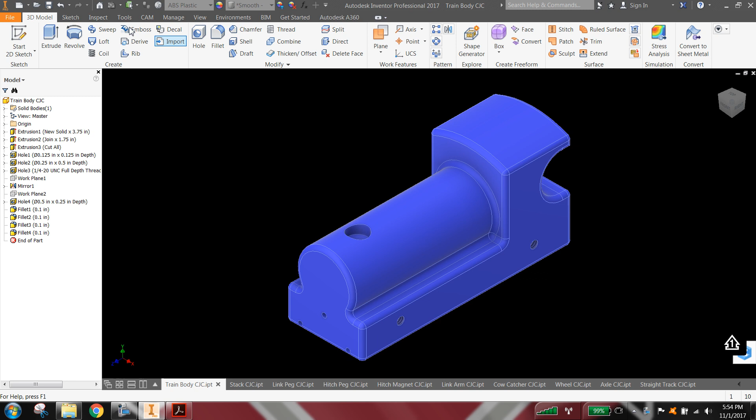Okay, now that all the parts are built, we want to do the assembly. So we'll go ahead and start a new assembly file. Make sure you don't start a weldment assembly. I always like to stay in isometric view when I'm working on things. So I'm going to come up here and place the base component of the train, which of course is the train body. So I'll bring that in.

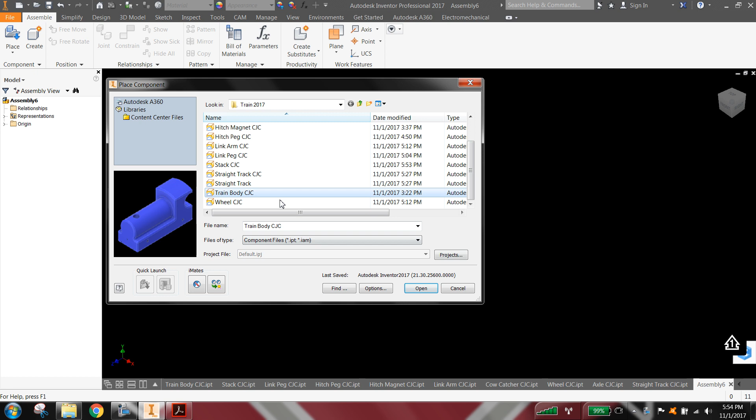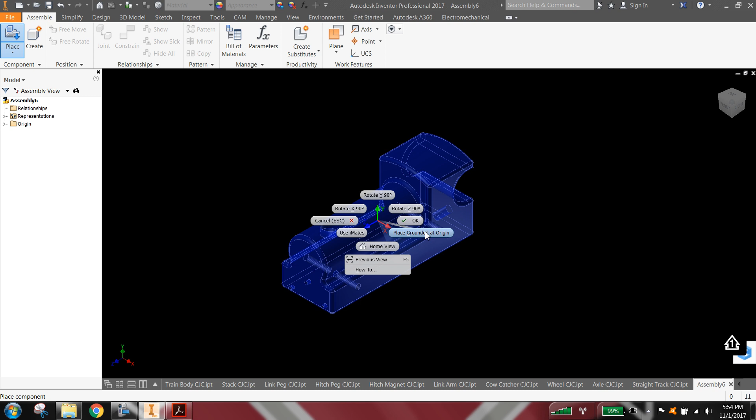Okay, and when I do that, if you happen to build it laying on its side or standing upright or something, you can come in and select rotate around X, Y, or Z, and you might have to do that multiple times to get it in the right orientation. What you do want to do always is ground that first part at the origin. Okay, and then it pops up with another train body. So that tool is still active. If I wanted to bring in multiple of the same part, I could do that. Well, I don't want to.

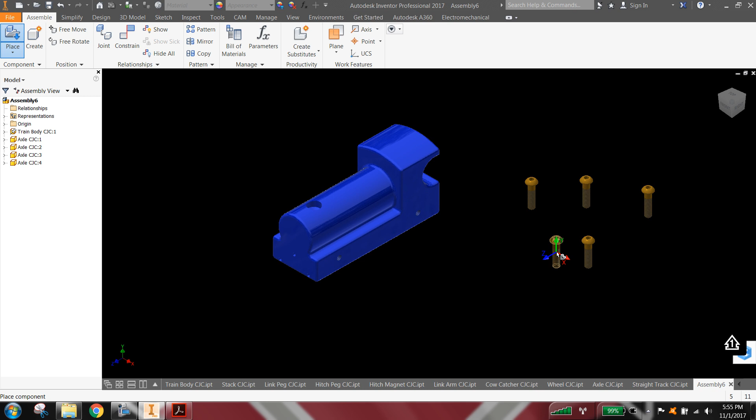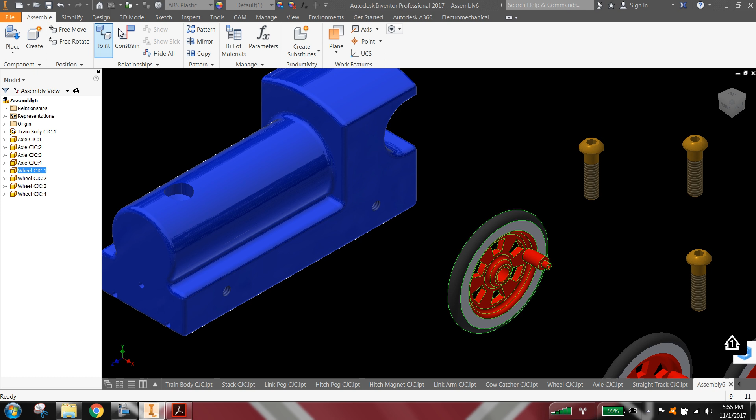Next thing we would do, let's go ahead and bring in the axles and the wheel. Okay, so there's 4 axles, and let's bring in a wheel. Actually 4 wheels. Okay, so most of the train, because all the parts are round, are put together with inserts. That's what we would do. We would insert the axle into the wheel, if we're doing this physically, and then the axle would go into the train body. So I'm going to go up to Constrain, and here's the insert constraint.

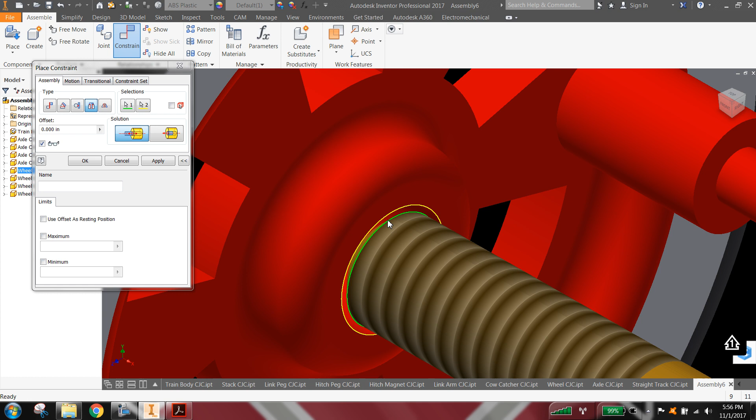And now here's where you need to get good with your mouse and picking things. If you pick the end of the axle, because it looks like that's what you might want to do, and pick the end of the wheel, well, you inserted it, but all that really does, as you can see, is line up circles. So I don't want that. What I want to do is line up the circles that need to be up against each other. So I'm going to select Insert again.

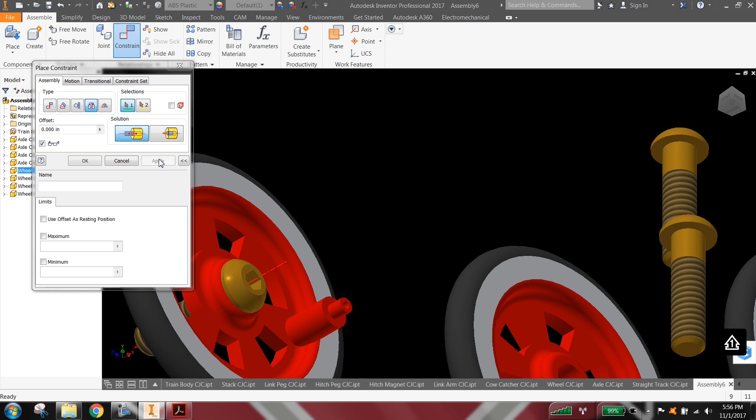And so this, what circle hits the wheel? That one right there. That hits the wheel on the outside edge. Okay, now you heard that pop. That's a good thing because that means it's going to be successful. So I'm going to go ahead and select Apply. Okay, and then we would have kind of the same thing going on with putting that wheel onto the train body. I can't see the inside of where that hole ends very easily.

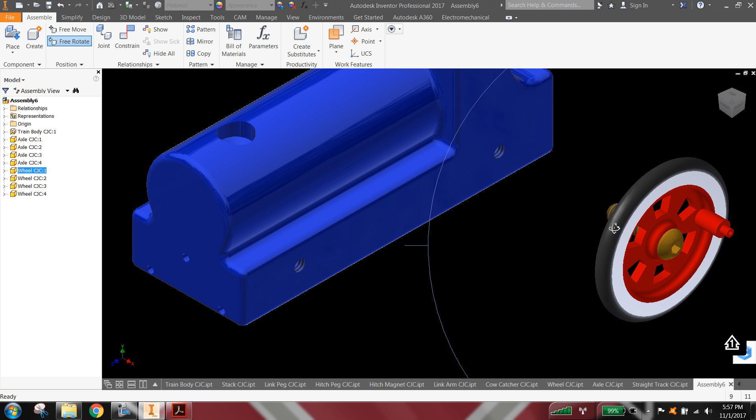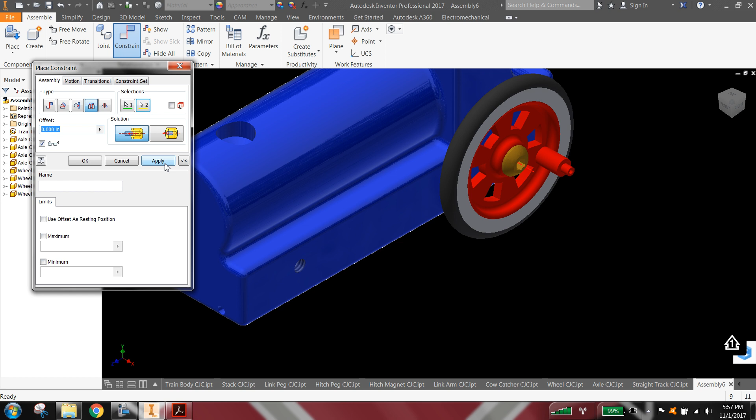So what I want to do is I have this free rotate tool up here. I can rotate around the wheel, and I know, yes, the axle goes into the hole, but in terms of the assembly, all I really need to do is align with an insert constraint the back of the wheel with the outside of that hole and click Apply. Okay, so that's very simple.

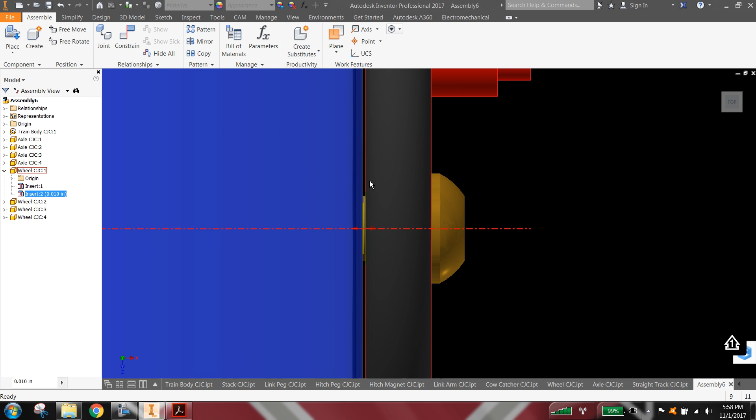Now, we have a little problem with that. If we're trying to be realistic, you can see we just screwed the tire tight to the side of the train body. So to be a little bit more realistic, let's find where that wheel is. If I point at it, it highlights in the browser. That was my second insert. I could do this on the fly if I knew what I was doing, but what I want to do is make a 10 thousandths gap on the spacing between the inserts. So we're going to offset that 10 thousandths. When I do that and you zoom in, you can see now we have a gap big enough to let the tire spin. Okay, so the rest of the train is pretty much put together with inserts.

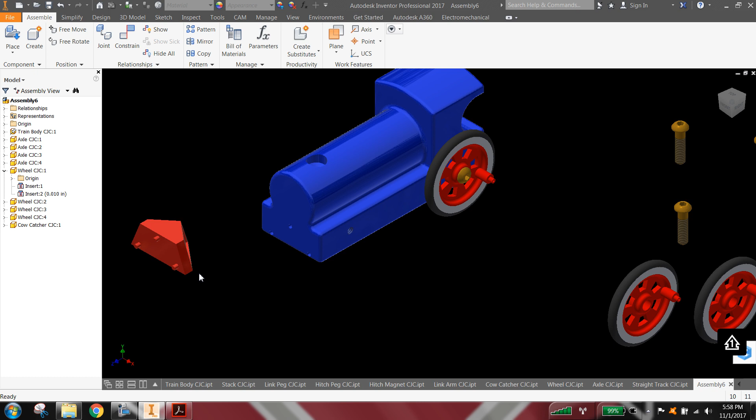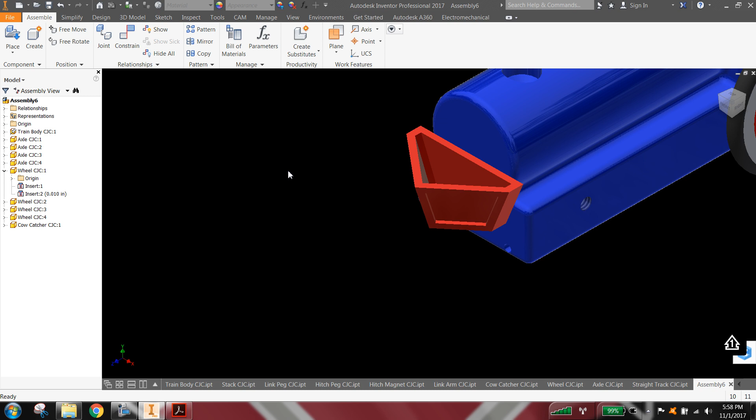I'm not going to do all the wheels. Let's demonstrate one more with the cowcatcher, because it has 3 pegs. So again, we're going to constrain, insert, and again, it's hard to get the inside of the hole. So I'm going to pick the outside hole with the circle on the back side of that peg. And I click Apply. Okay, so now what happens, oops, let's hit Escape.

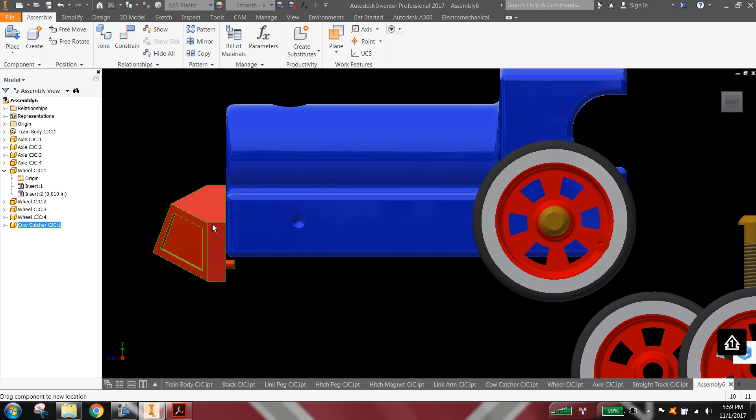I did a free move now, and it pops back into place when you start moving it. So we can see that it is up flush against the train body, but it's still rotating. Even though that's physically possible at times, it's still spinning around. A part before it's constrained has 6 degrees of freedom. It can move in the X, Y, and Z axis as a translation. That's 3 degrees of freedom. And it can also rotate around X, Y, and Z. And that's what happens right now. With that 1 degree of freedom remaining, it's rotating around the Z axis.

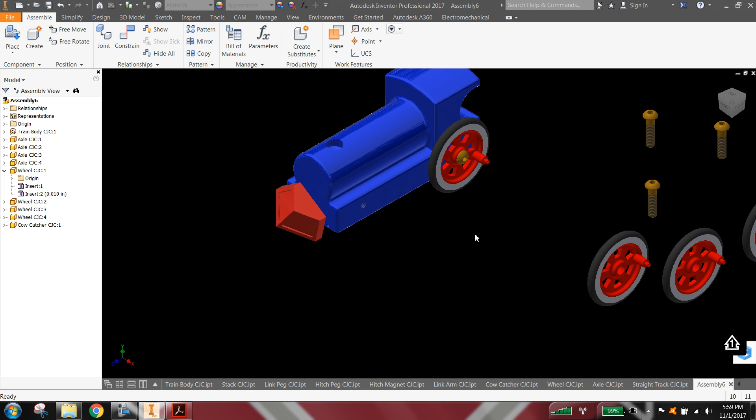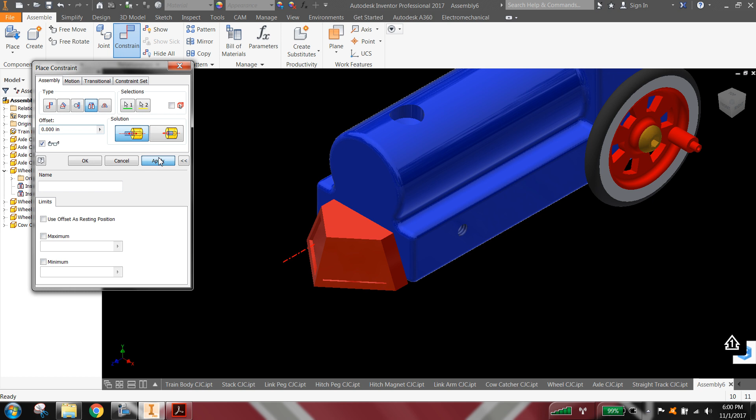Now, it's hard to see the parts that we need to put together. So I'm going to do a free move of the cowcatcher out, and then do a free rotate and rotate that around, because I need to put at least one more constraint on there so that part quits moving. So I'm going to pick, again, one of those back circles of the peg, and the other one, and click Apply, and that should be good. So now when I go to grab it, I get the Ghostbusters can't-move-it sign. That part is fully constrained.

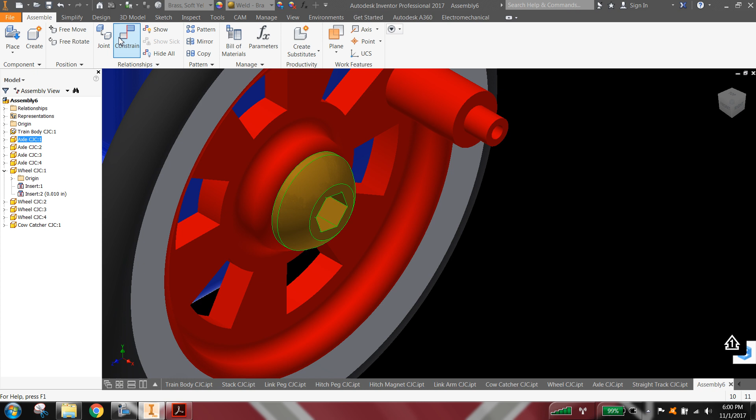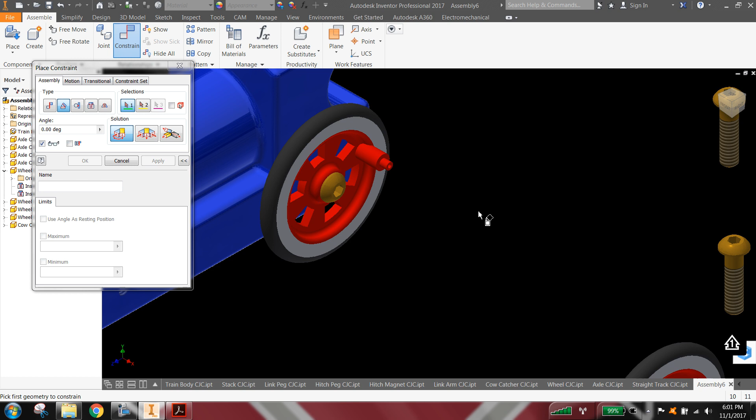Now, on my tire, the wheel still rotates, and in fact, the axle still rotates. Is that axle really going to rotate in real life? No, it wouldn't. So it's not going to really affect it any. But if that bothers you, we could put an angle constraint, and I could pick one of the sides of that hexagon and constrain it with a 0 degree angle to the bottom of the train and click Apply. And now that we have that constraint on there, the axle doesn't move, just the wheel moves.

Okay, so I'm going to leave it to you to put the rest of the train together with insert constraints, and in the next video we'll talk about angle constraints and getting it on the track.